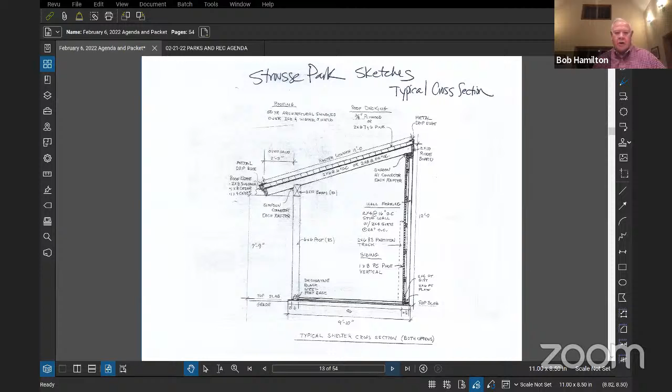So we're looking at putting piers, regular concrete footers, 4 feet deep, 42 inches deep, under the posts, 12 inches in diameter, something like that. And then we're currently looking at putting a grade beam across the back near Kneisel and Anderson using screw piles, which are metal piles that literally screw into the ground.

I've got a structural engineer thinking about that right now, and I'm going to meet Thursday or Friday of this week with a screw pile company out of Breckenridge to get their take on it. That would be very minimal disturbance to the area around the Kneisel and Anderson building. I don't know what the costs are going to come in at, but we'll look at that. That's kind of where we're headed for the foundation across that back wall.

Getting back to the DHM design, it's pretty much what you've seen before on the plans they provided. It winds up with 12 booths, with a windscreen set off to the back, and then a separate shed for storage of the partitions and any other park equipment. The alternate design, which is option 2, gives us the same number of booths.

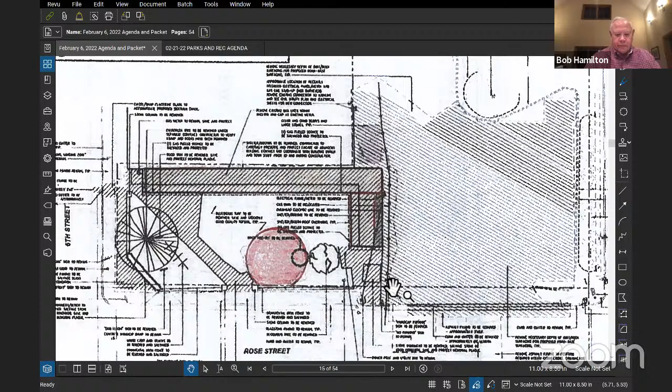We'd be able to walk through from the plaza to the parking lot and then over to the restroom, and it would be covered. So you'd have the ability to use that area to put up signage, or inside, with covered lighting and all that good stuff.

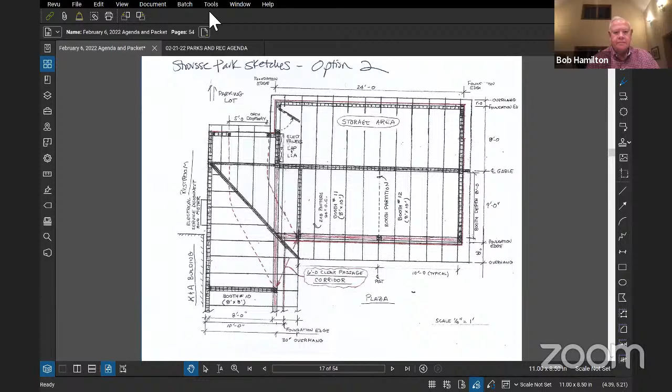That would eliminate the need, there we go. So you can see the corridorway on that, basically a 6-foot wide corridorway from the two walls, the wall that says booth number 10 under it, and then the closest wall on the 2-booth side. Those would be walls that would go all the way to the ceiling, all the way up. So that whole area would not be considered a booth, it'd be a lighted corridorway, roughly 6 feet wide by maybe 20 some odd feet long.

I think what we would do is, instead of having the jog where it says parking lot with a double arrow, we'd probably just bring that plane right out to the edge, instead of having that jog there, and just make that a little bit deeper. That just makes it a little easier for construction.

Then the storage area, the existing booths have about a 2 or 3 foot deep storage area behind them. We would expand that so that it were in the order of 8 to 9 feet, so we have a nice storage workshop area that you can access directly from the plaza area, from the park or the parking lot, for storage of the partitions, storage of any materials we need for maintaining the plantscape, and anything else we want to use for storage. It's lighted, and it's got electrical outlets and all that stuff. We'd also put the electrical panels probably in there rather than outside, to keep them more protected.

So we would not need the windscreen with this approach, so we save some money there, and we would not need a separate shed across the parking lot, so we'd save some money there too. The cost estimate I did came out, for all intents and purposes, pretty much six of one, half a dozen of another, which design you want to go with. So cost is not a big issue. We can make them both work.

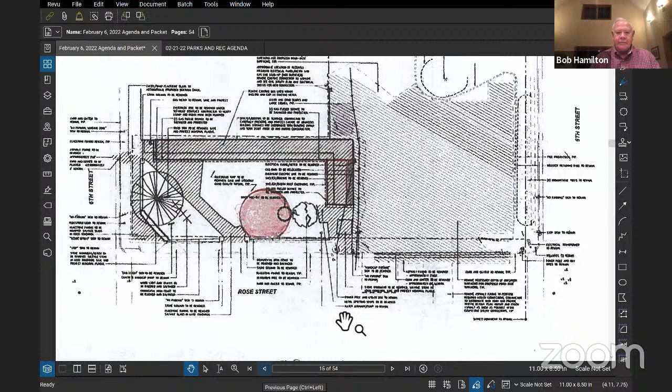And I will just speak to cost a little bit. I had a meeting with Cindy Neely and with Mary Sims to look at how we might fund this. Cindy has looked at grants, and the likelihood of us getting grant money to support this project doesn't look very good. She's explained that to the Board of Selectmen. And at this point, I don't think we're going to pursue a grant unless something changes. So it falls back on the town to, can we afford to support this project? We're looking at about a $255,000 budget, control budget.

Mary basically found where we could support that out of different capital funds, one of which is the Park and Recreation Capital Maintenance Fund, or Capital Improvement Fund. She asked me if I could get a commitment from you guys for $100,000. I think your budget for this year is like 110 or 111, and she thought that the $100,000 would work. And then the other is coming out of Conservation Trust and Sales Tax Cap. Don't ask me what those are, you have to talk to Mary.

So there's two things I'd like to get accomplished tonight if we could. One is option one or option two, which is your recommendation, and then the commitment to allocate $100,000 out of the Parks and Recs Capital Improvement Fund to go towards the shelters for this year.

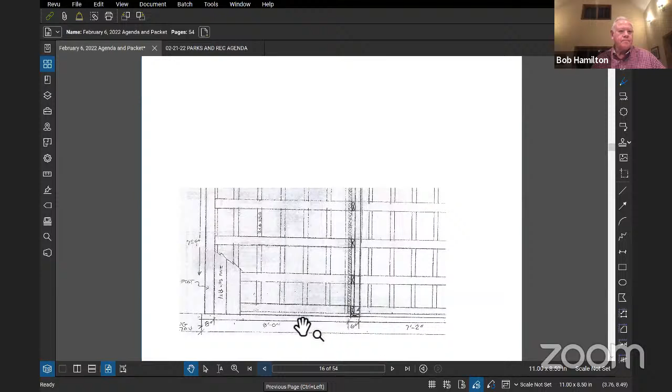We're planning to go to the Board of Selectmen, I think it's on the 8th of March, for approval for this project. So once we get a decision from you on which one you want to go with, I'll go ahead and prepare the package for the Board of Selectmen, and then we'll be off and running. The nice thing that Cindy pointed out about the town funding the project is it gives us a lot more flexibility in control and scheduling of the work. Like we don't have to wait until June to get started.

The budget is based on using contract labor.

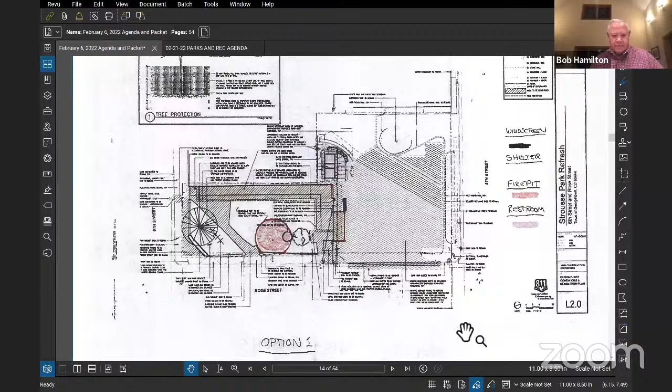There are opportunities for some volunteer labor in there. There may be some opportunities for either donations, or one thing I'm looking into is the possibility of a company coming in and removing the shelter, just the wood part of it, for its salvage value. In other words, they take it down, get rid of it, and they get to keep the wood. So the structural engineer I'm working with has a contact he's looking into for me to see if there's an interest there.

Another thought is, if there are people we can make wood available to, come and get it type of thing, so we don't have to pay to get it disposed of.

So there are things we can work out, but once the project gets approved, the next step will be to come up with a detailed execution plan, schedule, nail down the control budget, and come up with a safety plan so that anybody working on the project is protected, as well as the general public. So we'll need barriers and that kind of stuff. That will all be in the works once we get to the next step. So that's my 2 cents worth, and I'd be happy to answer any questions anybody has.

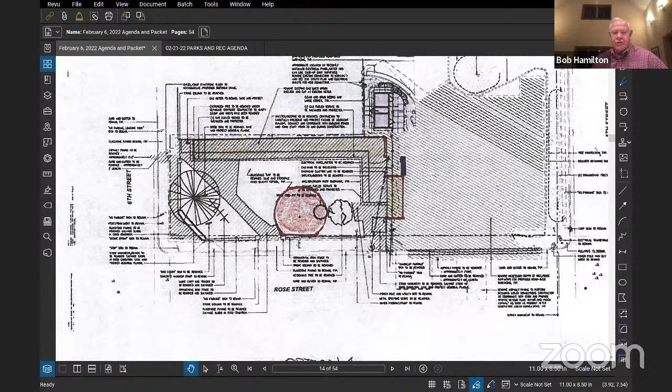So each booth will have its own power source, is that correct, like electrical outlets? Yeah, the electric design by DHM, I see one change to it. The DHM design has a quad, which is basically 2 duplex receptacles in each booth section. So there's 4 plugs, plus 2 strip lights and 1 heater, with a switch for the heater that goes high or low. They also have a $10,000 controller for the heaters, and best I can tell, I was shocked when I finally found out the price for that thing.

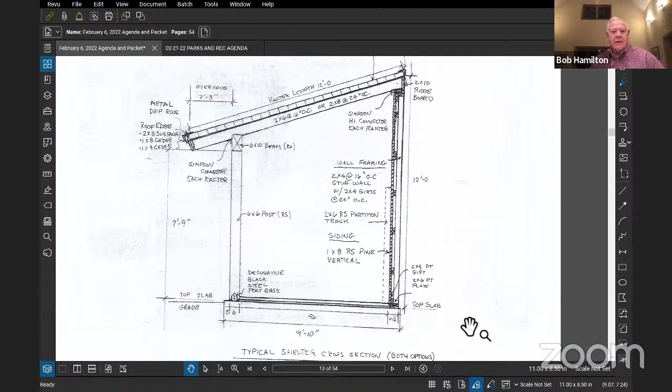The rationale behind this controller, which I think we can delete, is that if you were to turn on all the heaters at the same time, you'd have a lot of inrush. But first off, they're electric heaters, they don't have much in terms of inrush at all, the power factor is like 1, so that's not an issue. There's no reason why we'd have to turn all the heaters on at the exact same instant, we could turn this breaker on, turn that breaker on. So there's $10,000 in the budget that's going to go away, unless someone can tell me why they want to do that. It's like a soft start for the heaters, which you don't really need, especially for what we have.

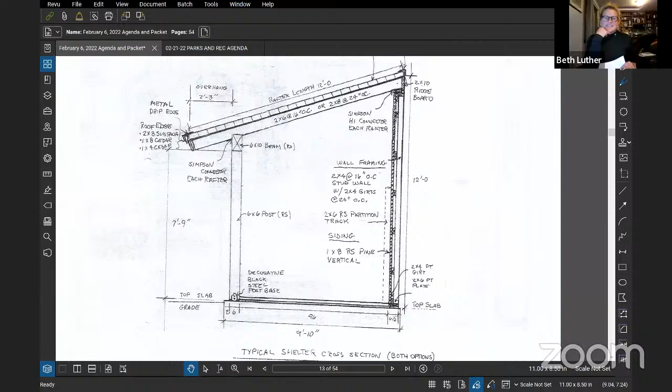Okay, but the electrics would basically get new lighting, new outlets, and heat. So right now, I think to turn on the lights in the booths, there's a panel in the back. Is that still how it's going to work, or is it? No.

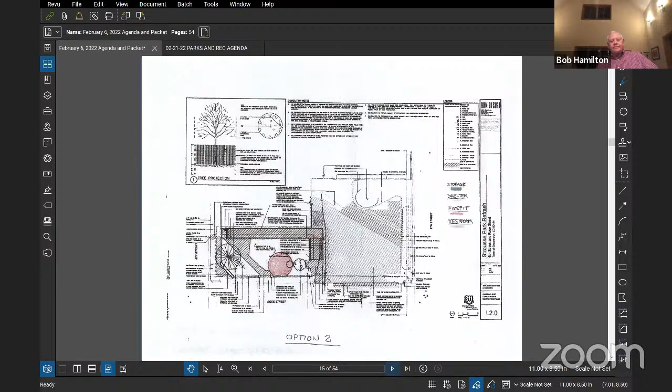There'll be 2 strip lights, one in the front, one in the back. You'd be able to turn them on, and I think even dim them individually from within the booth. The way they have it, it's battery operated. You wire up the lights directly to the panel, but they have a wireless remote control that looks like a switch on the wall, one for each light.

So in that breezeway, in the picture Steve is showing, I'm thinking about storage for things. In the bottom, in that purple section on the bottom left, is there any room to put shelving or hangers in there for brooms, dustpans, or something like that? Because I can tell you, I've cleaned those booths out many times. That's for this area, Beth. I'm just trying to make use of it for a while.

You could put them in there if you wanted to, but they'd be nice and accessible until two days after Thursday when they've all disappeared. Yeah, there's that. We have the storage area, plenty of room in there. I'm trying to make use of that extra space.

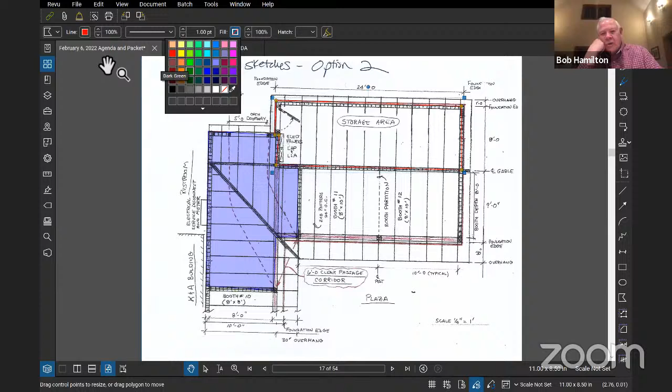That's all I'm thinking. So what about signage, permanent or temporary? Oh, that's a good idea. Like some interpretive kiosk. We could put in, I don't know about track lights, but floodlights. We can light it, and there are a lot of things we could do. We could put a couple of benches in there.

Yeah, for shelter. The line for the restroom in bad weather, we'll be able to be in there. If we want to put heat, we'll put heat in there too. I mean, it probably would be a good idea to put a heater in there. Yeah, it would be a good idea now. People could stay there if it's cold.

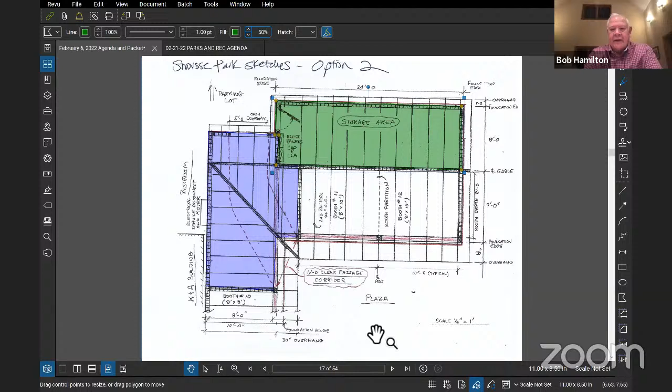Yeah, I mean I like to keep it as open as possible. This would be more shelter, maybe hang some signs in there. There was talk at one time about a video type terminal thing, a video bulletin board type thing. If we were going to do something like that, that'd be a great place to put it, because it would be protected. Yeah, that's true, that's a great idea.

Okay, and then Steve, you had that kind of side view of the booths. So Bob, right now when you go into each individual booth, they have a front counter. Will these have a front counter or a removable front counter that vendors can use to put their stuff on, or do they need to bring a table? How does that work?

The thoughts were to put a removable front counter in, but that's difficult because you have to support it and still be able to get in the booth. So my thoughts were they could bring a table, which would be on them, or we could have some nice folding tables. I think that's a good idea. They could be used for other things as well, just bring them out, put them in when someone wants it, and they could rent those from us. Yeah, that's great.

So you said there was storage in each of these booths. I was trying to picture that. Well, there's not, right now, but the back wall is a smooth, all-one-plane surface. We could put shelf brackets on there with removable shelves, or you could put permanent shelves. There are things you could do on the back because it's not going to be clapboards or lap siding, it'll be flat. So you can do stuff.

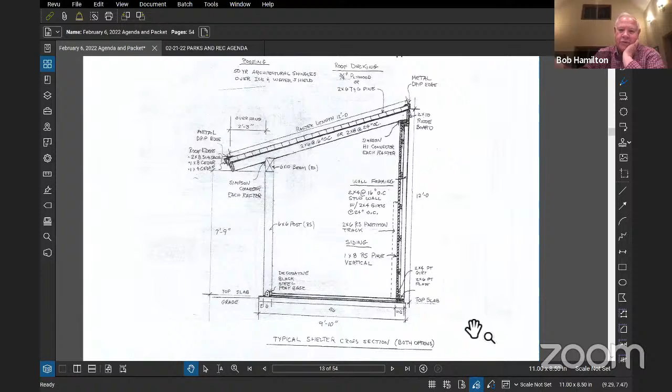Vendors could come in and hang a poster up, or we could have posters temporarily there during the summer or whatever we wanted. It kind of gives us a blank canvas. If we wanted to go ahead and have like a fold-up counter in the back, we could do something like that. We don't have anything like that in now, but what your imagination can come up with could be done pretty easily, because you've got a lot of structure there and a good surface to do stuff on.

I'm kind of leaning towards, once we actually go buy material, shiplap siding. If you're familiar with it, you wind up with a small groove, but you don't wind up being able to see through like you can now. It's a little more refined than just vertical boards butted up against each other.

I was sort of thinking, and you guys can laugh at me because I'm kind of an IKEA nerd, but I'm thinking kind of the fold down ironing board that attaches to the wall and then folds down and makes a shelf. That's a good idea, don't be hard on yourself. Bring your iron.

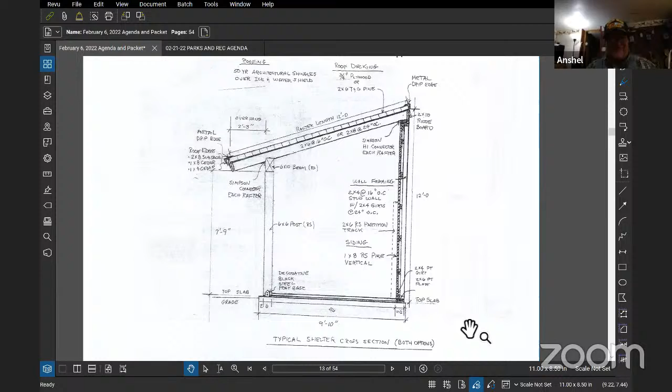I think that's something we can add later, after it's built. Get them built and take a look at it, and then along with the folding tables, figure out how you want to handle it.

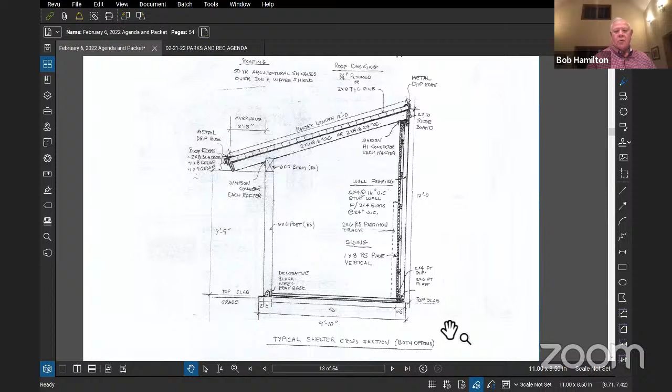I do like that the slab - we are pouring a slab at the same elevation now, so the stone can run back. Well, the slab would go away - the stone would be set, there would not be a slab. The stone would be set in sand. So just a sand set back? Okay, I got you - so you're gonna pour pylons and then stone around it. That's even better.

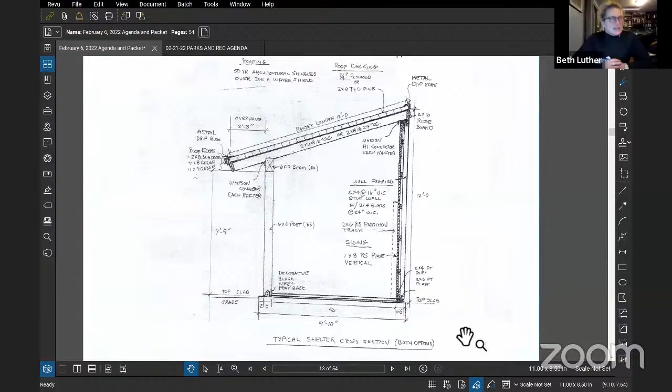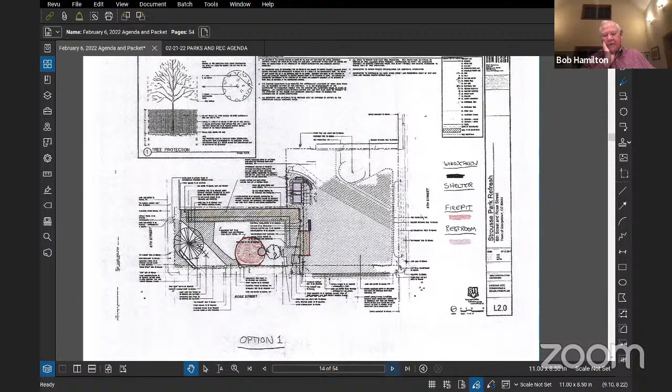One of the huge challenges, or mistakes, that we had with the current Strousse Park was not having gutters, and it just eroded away the ground and the grass, turned it sometimes into a mud pit. We've talked about putting in a drain instead of a gutter on the roof because it's 100 feet long - it gets hard to put a gutter up that's going to drain right. What we talked about is putting a drain in the ground, like a French drain with the metal grate over it. We've talked a little bit about that, nothing definite yet, but that would come when we get into a more detailed design.

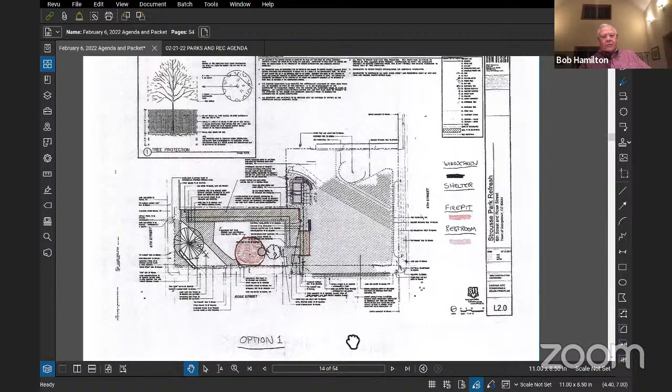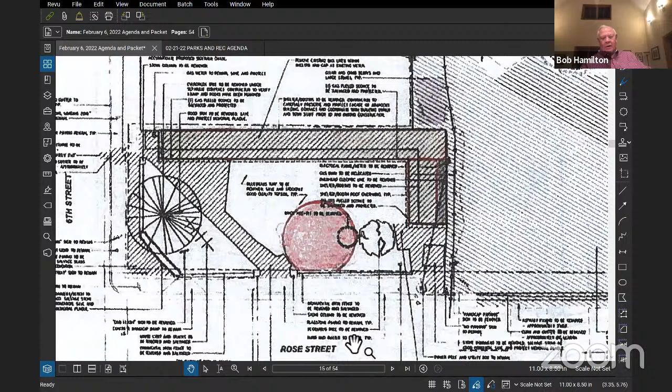I don't want to forget about drainage this time. One of the things is from the north to the south side, parking lot to 6th Street, there's about 1.5 feet difference in elevation, so we're gonna have to figure out exactly how we want to handle that. The whole building kind of just slopes there, you just don't notice it - because the post height from the bottom to the top is roughly the same on the 6th Street end as it is at the other end. If you look at the grading drawings DHM did, there's 1.5 to 2 feet difference in elevation, so I suspect the whole shelter kind of tilts down, which may be fine.

Yeah, we noticed that with our ice rink too.

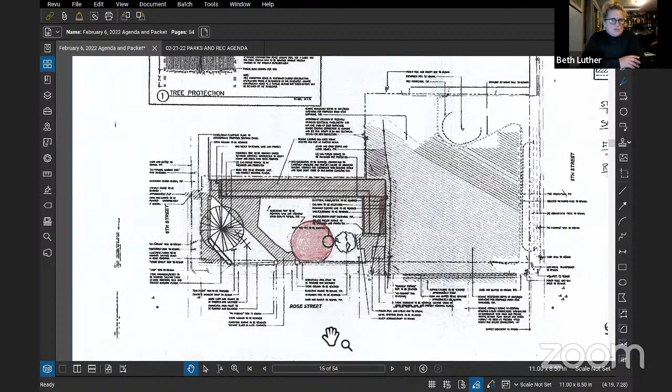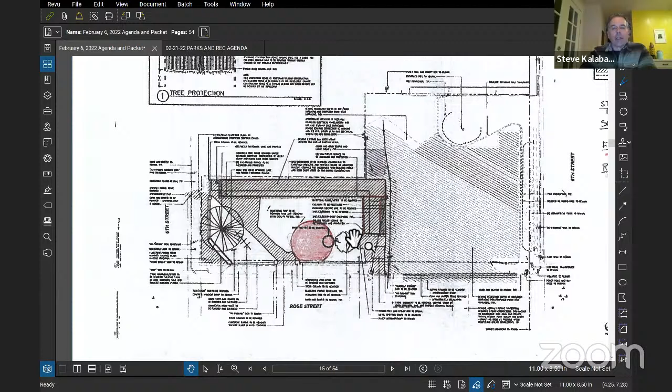Okay, which one do we lose all this - we lose part of the park. Which one has the breezeway? Option 2, you mean the covered breezeway - yeah, option 2 is the covered breezeway. So we moved this booth closer and lost some of the park. Or option 1, it was more open. Oh I see, okay now I see it - option 1 pushes that booth, there's no storage, it's strictly the 2 booths, and it pushes it out very much into the parking lot.

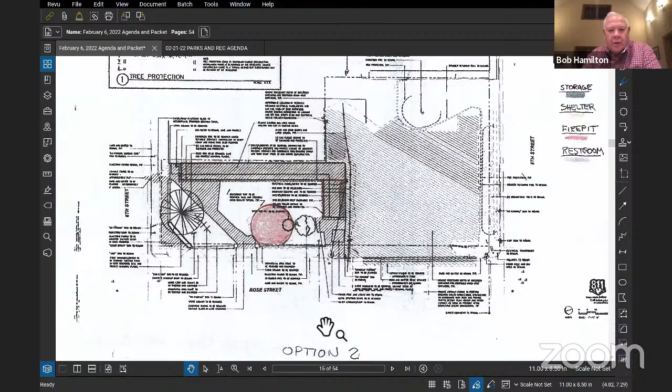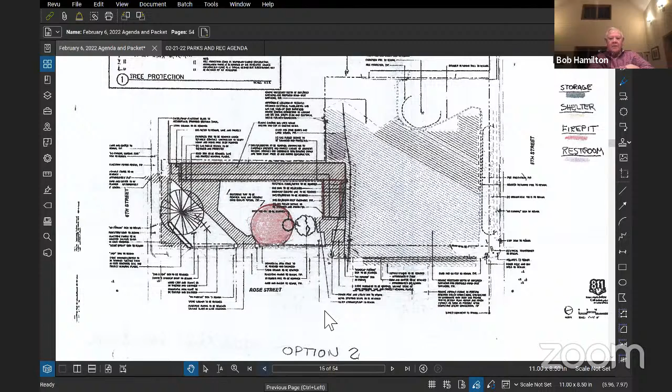The difference is these booths are 10 feet wide in option 1, and now they'll be 8 feet wide. Same number of booths, just a little smaller. The business promotion group actually liked the smaller option better, they were concerned about the depth of the booth. Width wasn't much of an issue, and 8 feet seemed fine there. From a booth standpoint, 8 feet is a good depth. Right now it's about 6 feet, a little less.

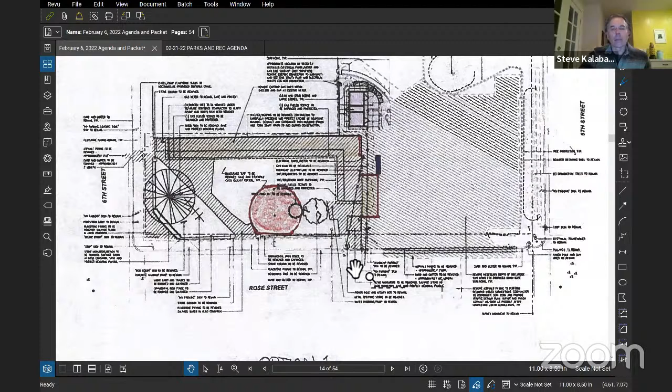And Steve, you like option 1 because it's more open? Yeah, we spent a lot of time on the design, and I like option 1 because we got rid of that L shape, we had a section here and a section here, so it's more open. I'm okay with option 2, but I like option 1 better. Option 2 is basically back to the old design, but it's open now.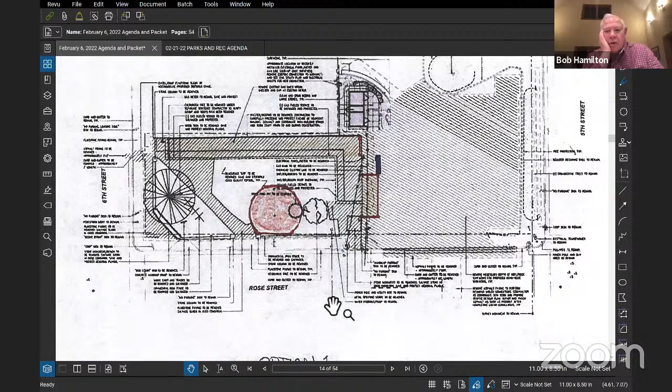Wouldn't option 1 have created an issue with wind? Well, that's what the windscreen is there for, that black blob sticking up. Oh yeah, option 1, this right here. No, you're on option 2. Go back to option 1 — that's the one with the wind tunnel and the windscreen. Yeah, that white part isn't going away. Okay, like I say, I'm okay with it.

Some of the thinking, mainly from DRC, the observation they made is that they really like the change in materials because it's more in keeping with what historically has been there. And they like the L-shape option for the same reason — it's less of a change to the park. That was the rationale they came up with.

Bob, what do you think? People can't handle change. Well, you got that right. This will probably be exactly right, more palatable to some of the old timers in town. Got it — I like option one best.

Just saying. Yeah, no, let's talk. Tom, Mary, which is your favorite? I'd love to hear from you guys.

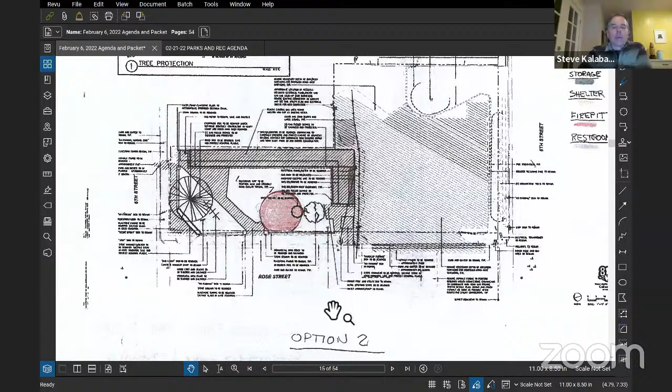My question is, was the booth size bigger in option 1 than option 2? The booth size in option 1 is 10 feet wide by 8 feet deep. In option 2, the booths along Niesel and Anderson will be 8 feet wide by 8 feet deep, and the two booths by the storage area would be 10 feet wide by 8 feet deep. So you get the same number of booths, but you lose 2 feet in each booth on the K&A side.

What size are we now, Bob? Roughly 8 by 5.5 or 6. Oh wow, the depth is 6 at most. And that includes the counter on the front. Wow.

I'll tell you, the other two commissions were unanimous on option 2. But don't let that influence you. Steve, will you show — just remember, we made the command decision on this, not anybody else.

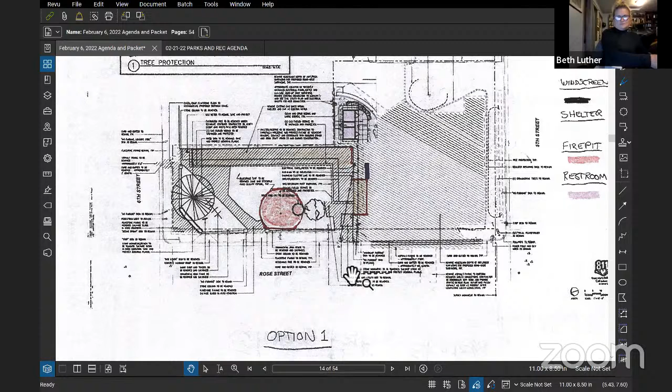Okay, so option 1 has a breezeway, but it has a screen, right? It has an open passageway — if you look at the renderings, it's not connected, I can probably pull it up. Yeah, that's the one you drew the purple on, right? No, that's option 2. So in option 1, that open area where the windscreen is doesn't have a roof, whereas in option 2 it's enclosed — is that what I'm hearing? Yes.

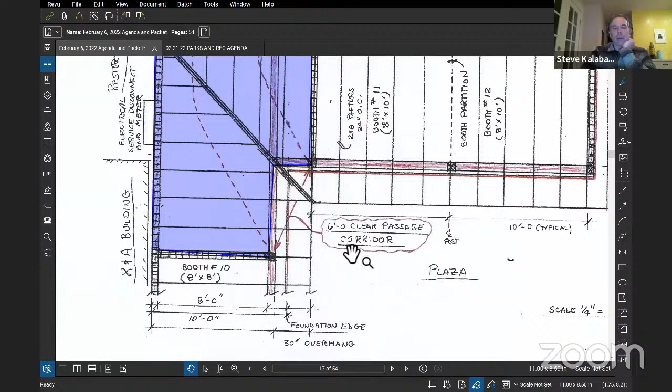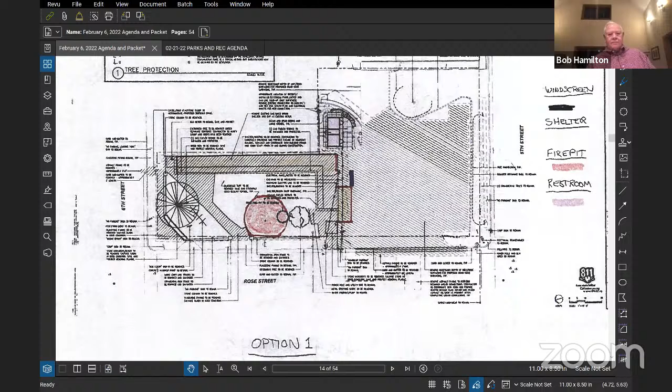You don't see it now? Now I know, that's option 1. Okay, it might take a second to change. Yeah, I'm showing option 2 now, but I'm not sure what you see. What does Tom think? Sounds good to me, I like it. Which one?

I'll see you upstairs then. Sorry, hang on one second. I love Zoom.

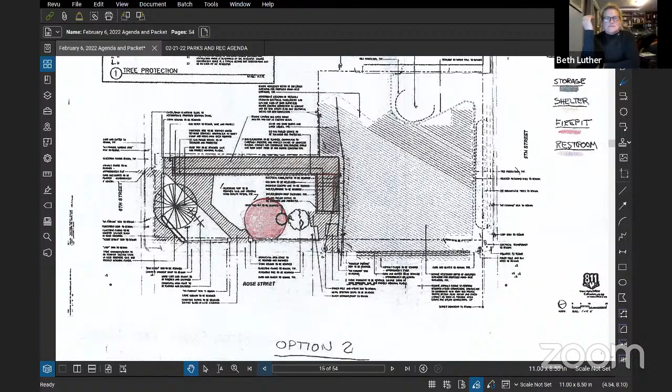Sorry, my child was talking to me also.

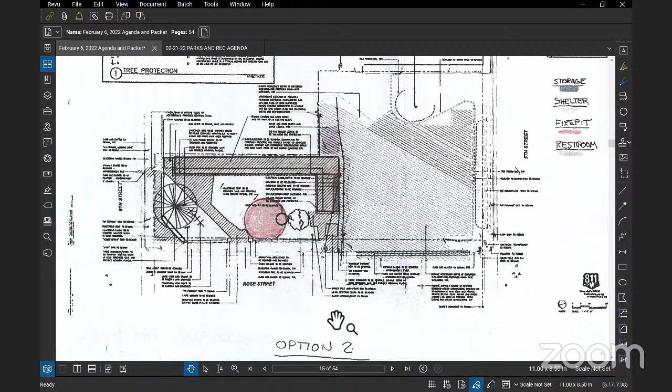I like the continuation in option 2, where it's continuous. Option 1 looks broken up to me - maybe because it's a bird's eye view of it. Yeah, that's what we were trying to do, but like I say, I'm okay with option 2, I just prefer option 1.

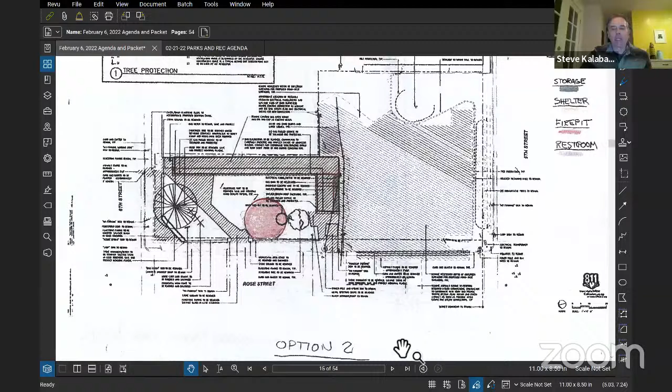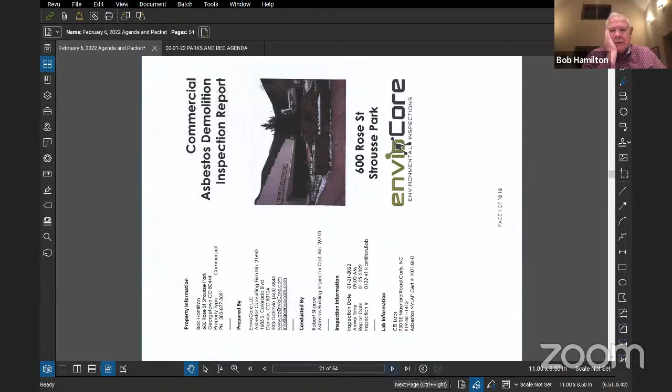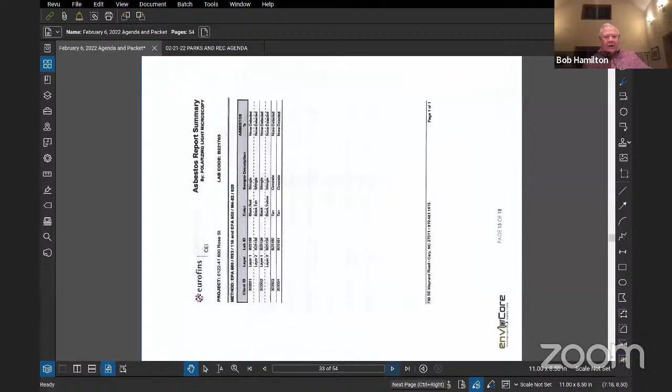Steve, do you have the sketch in there that's like a rendering that shows option 2? It's like a 3D thing, I don't know if it's in here or not. Was it in that packet? I don't remember. Bob, did you see that in the DHM packet we got from the beginning? No, it was something I put together on a program I have, I sent it out earlier to somebody. I'm gonna see if it's part of this whole thing.

That's the environmental report - all we need to know is no lead and no asbestos, we're good to go. That was very comforting. Yeah, and they even tested the concrete, took some samples - he said he's never found it in concrete but he's supposed to test for it anyway. I don't see it in here in our packet, Steve. Okay, it probably isn't.

I don't know, maybe I can share my screen. I can get out of mine, I've never done this so let me try it. See what happens - if all your computers blow up... no, it'll be fine. Just hit the share screen button first. Get your screen up, what you want to show, and then click on this. I just got through two weeks of Zoom meetings so I'm getting a little better at it. I do the DRC Zoom meeting twice a month, but that's different. Where do I want to go here? I think I want to go to my desktop.

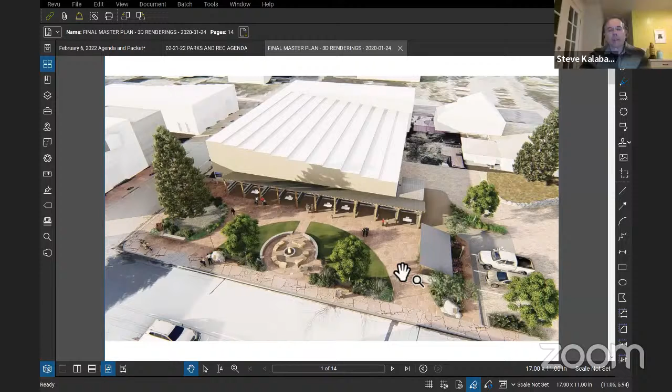Yeah, and that's before we sloped the shelter the other way out of the back. See how it's separate, and you walk around here, and yeah, right back in around the corner there is where the restroom is. So basically the shelter we're taking this and we're moving it forward, and going back doing it here - it would attach, and then you'd have the corridor way through there. And with the 5 or 6 foot wide opening into the parking lot on the parking lot side, you'd be able to see right through that. So it's not going to look like it looks now, where it's closed up and dark down there - you're going to have some light coming through there.

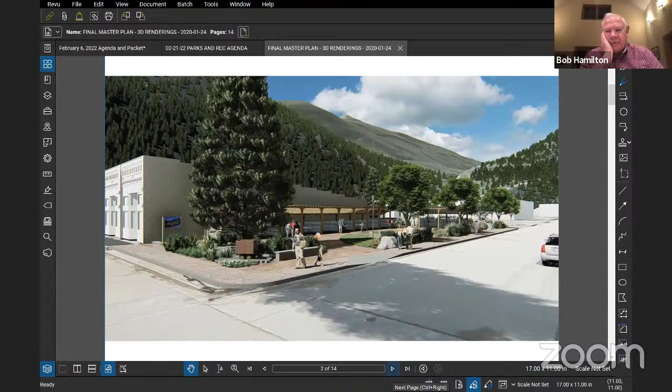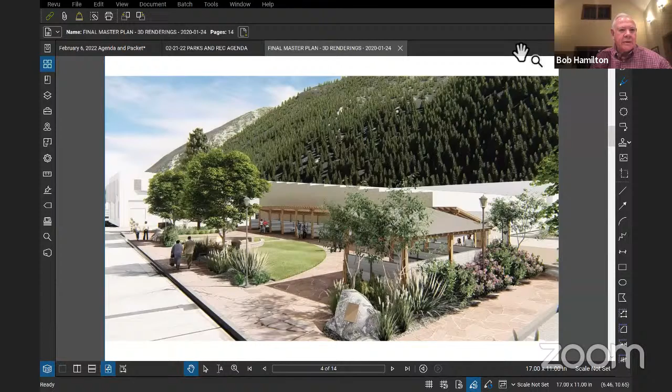Now did you have something you sent us? I had it at some point, and I may have just handed it out at the first meeting we had over at the Ganello brewery - yeah, that may be where it is. Ooh, I could send it to you, Steve. Yeah, I'm trying to see if I have it here - draft budget, asbestos...

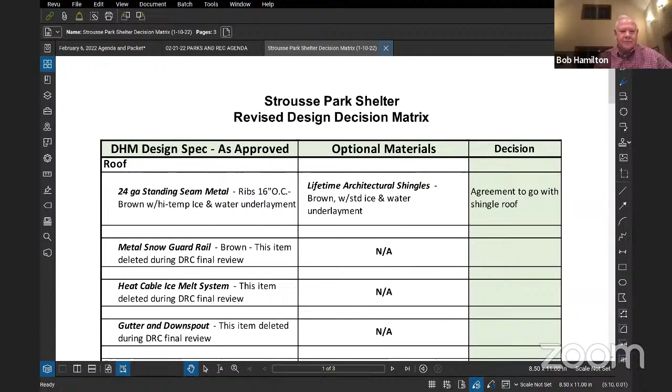It would be back toward the front probably. Nope. Okay, it probably wasn't in the package I sent out, so you just have to use your imagination. No problem, so we just had the artistic rendering of the one that Steve showed us, right? We didn't get... let's see if I have something else.

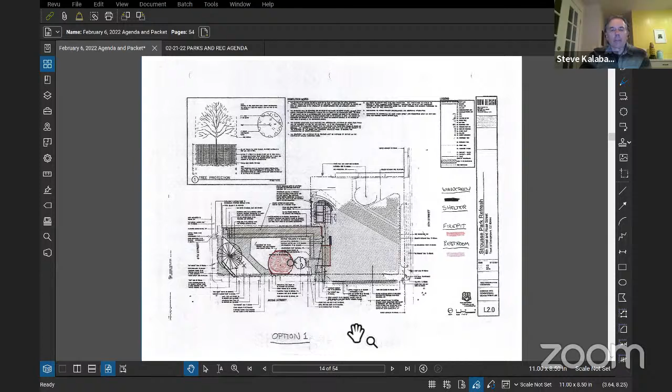Action. Let me know if it comes up. I will.

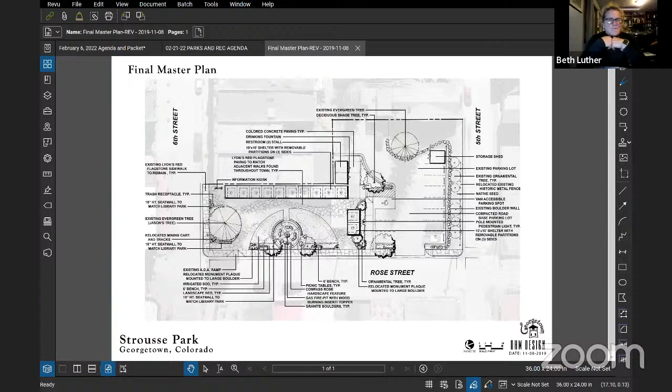Not yet. Huh, well, this is option one. You should see the other one come up. But we didn't have an artistic rendering of option two, right, that showed the breezeway? No, I can send that to all of you after the meeting. Let me know if this comes up.

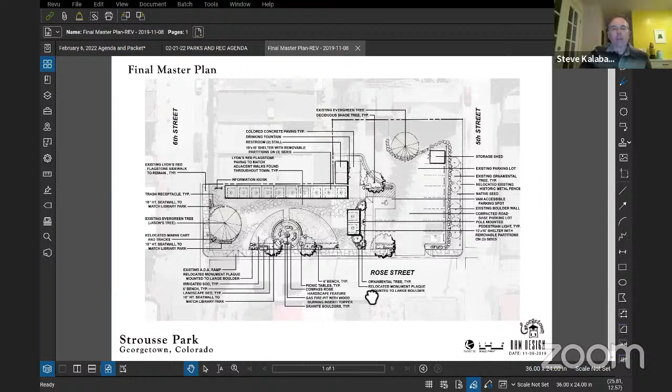This was the final plan. Yeah, this looks like the one, this was the final one, with the breezeway but no covered roof, right? Yeah, we had this like this, and this here, and this was open.

What we're doing now is removing this there. This will be a storage kind of thing, right Bob? So this will move, it'll be wider, in an L shape with the storage back here. That building there is like 10 feet wide and 20 feet long. The new building will be like 24 feet long and 17 feet wide.

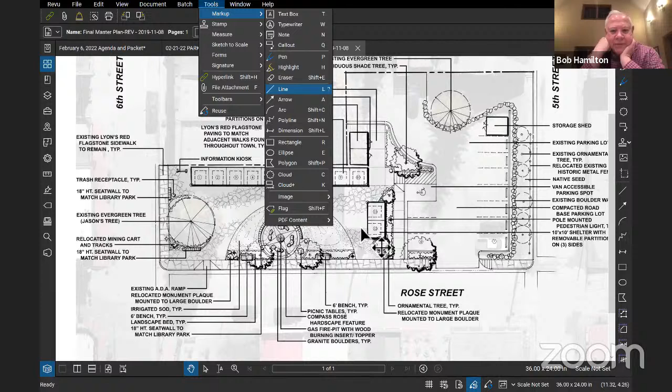So it'll move forward roughly to where booth 10 is, and it'll connect to there. It would basically make it solid, except it'll extend another 7 feet into the parking lot. So, move the right hand there, 7 feet deeper into the parking lot. This goes back. Yeah, yeah.

Too much? No, it didn't move. Didn't move. Well, you gotta give it time. There you go. Oh yeah, that's about right. And I don't think it'll be quite as long, I mean it could be, we could make it longer if we wanted to. It'd be about like that.

Now, is this like this, or square? Well, we could take that right-hand corner and latch it up with the back of the, I mean, we can do whatever we want back there.

Because this is gonna be open now, we are trying to save a little money, but I think that's fine. The stone's design is still there, we're still doing all the stone inside the booths. I think we move forward this way.

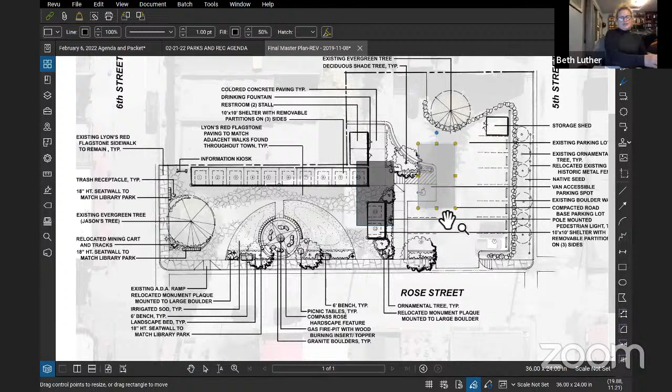I like this one. And honestly, with the breeze we get, a breezeway might not be a good idea, you know? When you say a breezeway, what are you talking about? Like when they're not connected and making the L, the amount of wind that might come through, it'll pull everything apart, you know?

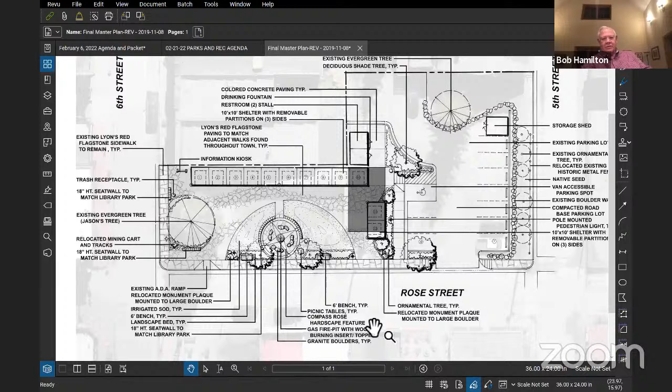The other thought I had with the L, particularly if we square that corner off rather than have it step in, we could put a barn door, we could go like this too. So that if we wanted to close that off or reduce the opening, we could do that. That's kind of an awesome idea. Things which would be easy enough to do.

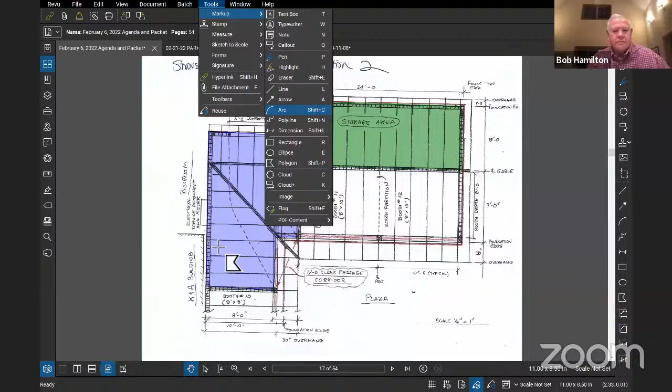So that's option 2. Yeah, we could even, I mean, we could do anything we want really. I was gonna bring that left-hand edge out so that it's a square corner.

Oh yeah, like this? Yep, yeah. Yeah, that's fine too. And then that gives us room where we could slide the barn door toward 511 Rose. The fact that this is nice, it's covered, but it's still open, so it doesn't feel like it's closed in like an L. I think we're fine, I think that's fine.

Yep, we have a big storage area now in the back. I think to me, that's the real selling point with this, is it's right in the park, so it's easy to get stuff in and out.

Yep, it's gonna have light in there if we want, you could use it for Parks and Rec meeting room. I don't care, it gives you a lot of plus because it'll have a solid concrete floor, obviously. You can store all those tables we're going to rent out for revenue. If you buy a bunch of plants you want to plant, you got a place to store them out of the weather till next weekend. It opens up a lot of possibilities, and it's got a door with a lock on it so you can lock it off and keep supplies. We can keep all those 9,000 lights we have for tree lighting.

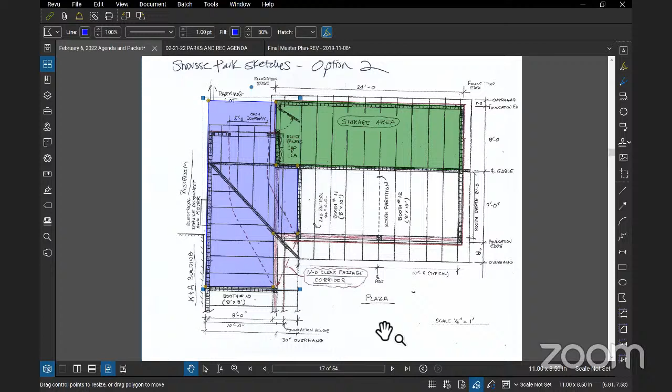I think so. All right, so all in favor of going to option 2? Aye. I'm gonna need someone to make the motion. I just thought of that before I said it. I'll make the motion. Beth, I second the motion. Is that Tom? Okay, thanks.

All right, all in favor of going with option 2 as drawn right here? I could save this too. All in favor? Aye. Aye. Aye. All right, option 2 is approved.

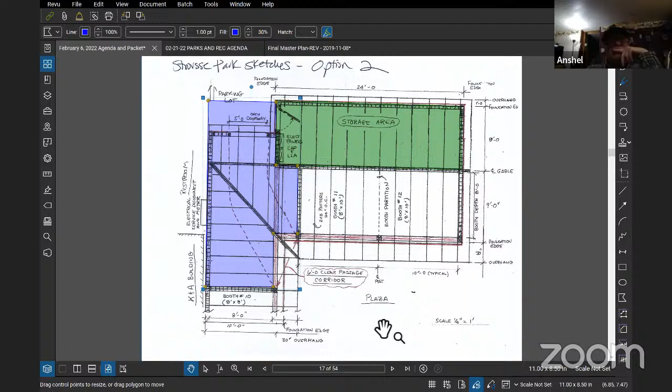Now I make a motion of allocating $100,000 from Parks and Rec to help fund this. So moved. I second it. All in favor? Aye. Aye. Aye. Allocating 100,000 is approved. Well, thank you all very much.

Thank you, Bob. The other two committees were also unanimous, so we can go to the Board of Selectmen saying that the 3 principal committees involved in this are all in agreement and that we found the necessary funding and we're ready to move the project forward. And I want to assure you that we will have a safety plan.

I've got one. Well, it's all about risk management. I understand what you're saying, and I'm going to let you finish in a second, but it's about - I've done research on the legality of it. Bottom line is we are covered under the Volunteer Protection Act, and the state has something too, but that still doesn't keep someone from suing us individually.

So I've upgraded, I've put more insurance on my house for more money. I don't want anybody taking my house. But bottom line is they can do that, and I don't want to see anybody get hurt. I think that's something I would want to discuss with our town attorney as to how we would protect the people involved, because the town does have some kind of insurance. I don't know the details, but there's certainly a concern.

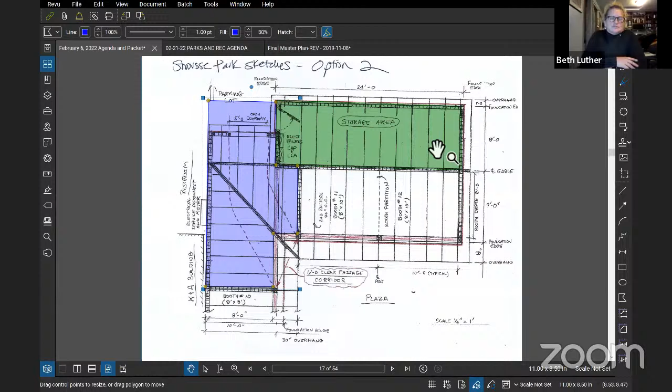What I do want to do is figure out, do we need to meet in 10 days again? Is that when we're supposed to have this approved? No, just our next meeting happens to fall in 10 days. Oh, that's right, forgot. I don't think we need to meet in 10 days, but we could do it just to put us back on schedule.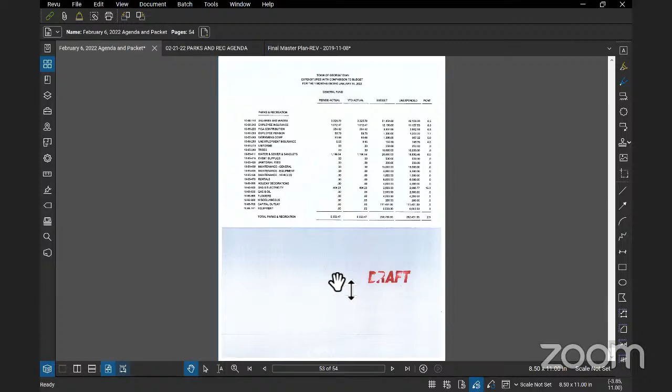Yeah, I agree. We should start talking about what we're gonna do with some of our dollars in our regular budget, not the capital that we just talked to Bob about, but the other dollars. Okay, well let's plan on meeting in 10 days again. If there's anything special you want to talk about, send me an email and I'll add it to the agenda.

Cool, should be an easy meeting, so it might be good for stuff like that, if anybody has anything weird to bring up. Maybe we can start meeting in person soon. Oh please, yeah, let's do that. Unless anybody super objects, then they could always zoom in too.

We could do both. No, we can all do it, but if somebody was uncomfortable, town hall hasn't opened their building for meetings. Oh, okay, not yet. That's them, darn it. Okay, let's get on with this.

Would it be wrong for us to meet, everybody who wants to meet up somewhere, and then people who are uncomfortable could zoom in? Yeah, but I can't hear when we meet somewhere. Like when we went to the brewery, I couldn't hear shit. Yeah, fair enough, we'll just continue on Zoom until... I'm not gonna make any more comments.

So what I would ask everybody to do, and I'll email it to you, is send you the narrative we submitted with the budget request, some ideas of where we were going to spend some of our funding, like any improvements in the park that are needed. I can't remember the last time we stained Foster's Place, stuff like that. Or do we need a park bench somewhere? I just want people to think about those kind of things, and if you've got some ideas, print a page off Google and bring it, or have it ready to show on screen, and just talk about ideas.

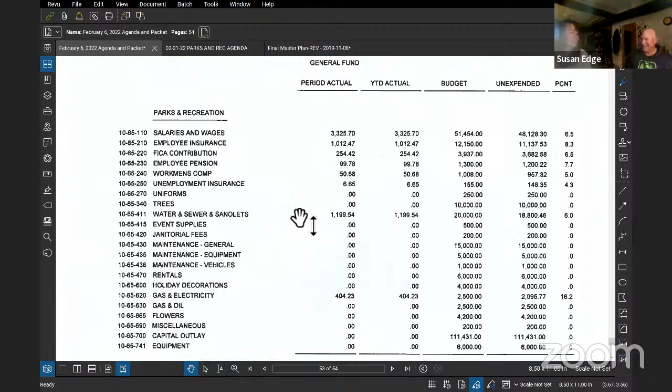Statues of the selectmen in all the parks. Oh my God, you're just asking for vandalism. Now it sounds like a good idea. No. I'll be the first one to tag it. This is being recorded. Yeah, I know, right? Whoever's less vandalized gets to stay in. That is hilarious.